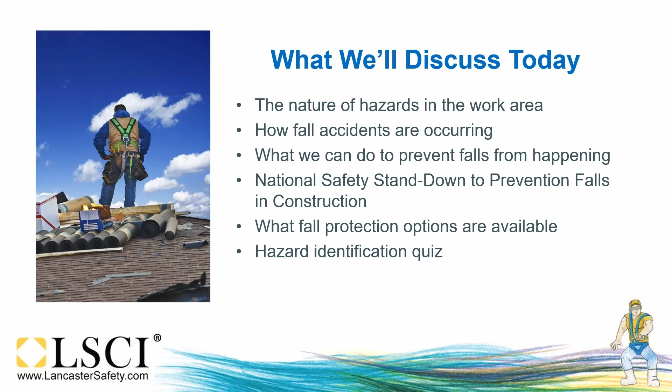Great. Thank you, Emily. You are correct. We could spend hours and hours, but today we're going to focus on the greatest hits. And the first thing you want to look at is the nature of the hazards in your workplace. Where might those fall hazards be lingering? There are lots of places. I mean, even weather can pose fall hazards. If I'm working outside and it's wet or the sun is restricting someone's sight, obviously, anytime we're working at heights, a crowded construction job site, noisy job sites.

And so the key is we need to look at where employees need to be protected from falls. So working in or on hoist areas where materials are being moved, ramps, walkways, and runways, areas where holes are present, maybe for utilities and ductwork, or stairwells, elevators. We want to make sure people don't trip or step into holes. Excavation is one of the most dangerous things that's done in the construction industry. And it's not just falls, but also caught in or between for cave-ins. Anytime we're around dangerous equipment. And lastly, wall openings. The key is any area 6 feet or more above a walking working surface, OSHA asks, be protected for workers to be able to be safe.

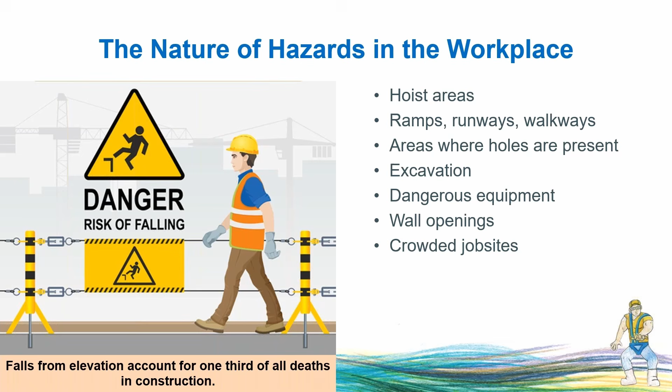So let's take a look at how fall accidents occur specifically. First, unprotected sides, wall openings, and floor holes. Almost every project site has unprotected sides and edges, leading edges, where floors are being constructed, wall openings, doors, windows, cross corridors, or floor holes at some point. If we're not protected from sight, injuries from falls or falling objects may result, ranging from simple sprains and strains to concussions and death.

A second area of focus would be scaffold. Scaffold temporary work platforms give us a great way to be able to work at heights temporarily. But we know that working with heavy equipment and building materials in a limited space of a scaffold is difficult. Without fall protection or safe access, scaffolding becomes very hazardous. Improperly constructed scaffolds can result in injuries ranging again from sprains, cuts, and death.

Third, unguarded protruding steel reinforcing steel bars used in concrete. Yes, we know we use that to provide tensile strength, and unguarded protruding rebar are hazardous. If you just stumble onto an unguarded rebar, you can impale yourself, serious injuries, or even death.

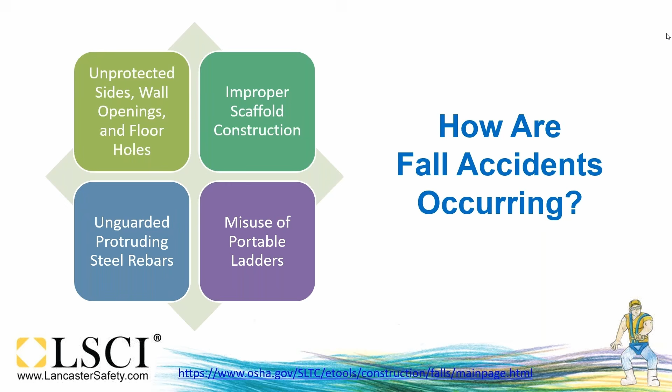I watched a person fall off a ladder and run their forearm through a number 5 rebar that was not capped properly. He passed out from the pain. An ironworker came along and cut the rebar with a chop saw, and they carried him off with a tourniquet over to the emergency room to pull the rebar out of his arm. I'm glad I wasn't there to see that.

And also, misuse of portable ladders. Ladders are a common tool that we use every day on project sites, and you risk falling if portable ladders are not safely positioned each time they're used. When you're on a ladder, it can move or slip from supports. You can also lose balance while getting on or off an unsteady ladder. Again, falls from ladders can cause injuries ranging from sprains to death.

According to OSHA, 40% of fatalities were from heights of over 40 feet. 1/4 of all fatalities ranged in heights of 11 to 20 feet, and 25% were from heights of 20 to 30 feet. The rest, 10%, were 10 foot or less. So just because you're not that far off the ground does not mean you won't get killed.

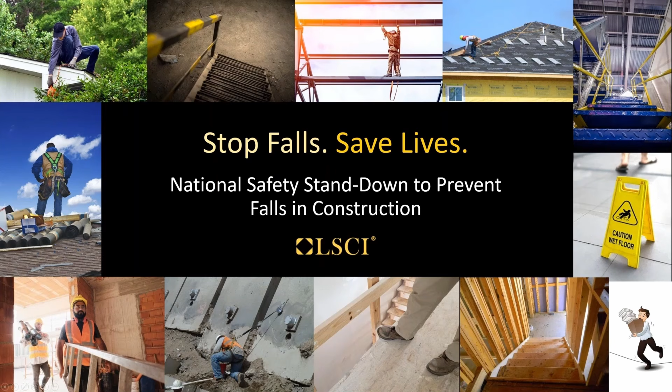Did you know that fatalities from falls from elevation are the leading cause of death for construction employees? Preventing falls in construction is such an important topic that OSHA leads an annual initiative of a National Safety Stand-Down to raise awareness on the dangers of falls in construction. While this is a voluntary event, Lancaster Safety participates each year and encourages businesses to do the same.

We take the entire month of May to highlight falls in construction and how we can work to get every employee home safely each day. So the content on the following slides provides information in conjunction with OSHA's National Safety Stand-Down to prevent falls in construction. Let's join together to stop falls and save lives.

Thank you, Emily. Last year, every working day, 15 people were killed at work. Of those 15 people, 10 or 11 were in construction. Of those, 4 or 5 were from falls. So fall hazards are common at construction sites, but even worse, fall-related injuries, which can amount to between 1,000 and 1,500 per day, are preventable.

There's 2 main ways we can address fall hazards. First and best is fall prevention. Let's prevent workers from falling by using engineering controls, guardrails, hole covers, or restraint systems. If we can't do that, or in addition to, let's provide fall arrest and rescue services. So this prevents injury during and after a fall by using personal fall arrest systems, safety nets, or having an effective rescue plan in place before starting the work.

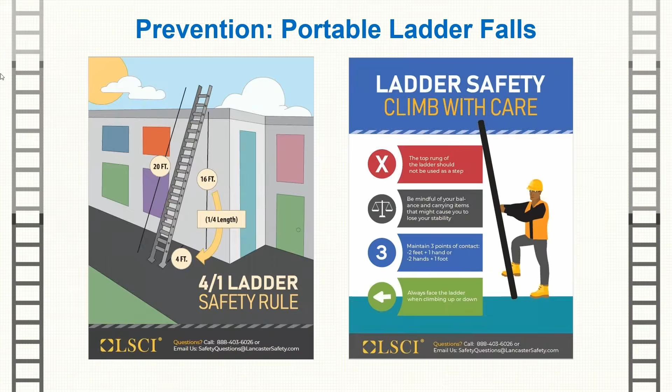Scaffolding is a wonderful tool that we use as a temporary work platform. Stationary scaffolds, suspended scaffold, aerial lifts, all allow us to work at height. The key with scaffolding is to make sure they are constructed in accordance with the manufacturer's instructions. Typically, you'll find that a guardrail system is required upon all open sides and ends of platforms. Oftentimes, suspended scaffolds will use guardrails as well as a personal fall arrest system.

We want to use at least a guardrail or personal fall arrest system for all scaffolding anytime that scaffold is 10 feet or more above a lower level. We want to make sure we provide safe access to scaffolds by ladders or climbing out of windows or other areas. There's details, again, available in the OSHA standard, as well as appendices showing some line drawings. And we always want to access scaffolding by these means of access.

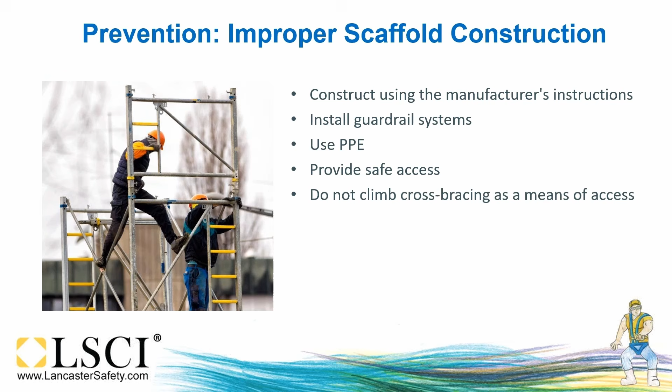We mentioned protruding rebar, again, used oftentimes to get tensile strength into concrete. It's pretty standard. Be it steel or fiberglass, we want to make sure we guard all protruding ends of the steel rebar with caps, wooden troughs, or bend the bar such the exposed ends are no longer upright. Anyone working at height that could be above an exposed rebar, we want to make sure fall protection and prevention is the first line of defense against impalement.

OSHA standard requires that rebar, quote, be guarded to eliminate the hazard of impalement, unquote. Not all guards provide that level of protection. In some circumstances, the force of a fall can cause the rebar to push clear through a plastic cap and still impale a worker, or the worker could be impaled by the rebar and cap together.

Make sure that you utilize rebar caps designed to provide impalement protection. Oftentimes they'll contain a steel or polycarbonate reinforcement inside of them. So yeah, please have the folks use those Mountain Dew cans and put them in the trash, not on top of the rebar.

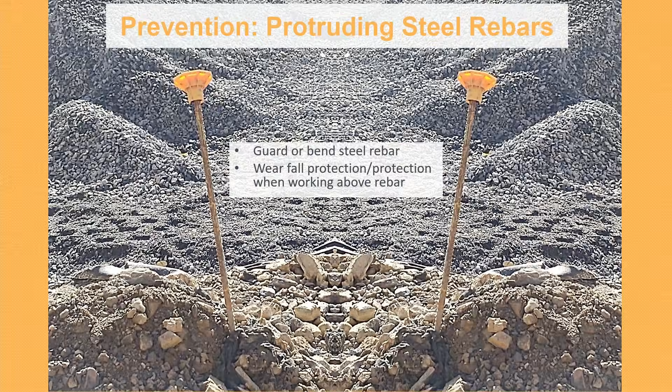Another area of issue is openings or holes. Typically guardrails, safety nets, and personal fall arrest systems are used. Again, if I can fall to a lower level, and that means walking on the ground into an excavation or from an upper level into a lower level, anytime I can be exposed to a fall of 6 feet or more, I want to use one of these particular systems. Emily, can you give us some more information about prevention for openings and holes?

Yeah, absolutely. So for existing structures, you want to survey the site before working and then continually audit as work continues. Guard or cover any openings or holes immediately. You want to cover or guard floor holes as soon as they are created during new construction. Construct all floor hole covers so they will effectively support 2 times the weight of employees, equipment, and materials that may be imposed on the cover at any one time.

So, in general, it's better to use fall prevention systems such as guardrails and then fall protection systems such as safety nets or fall arrest devices because they provide more positive safety means. And Emily, in addition to that, the covers, in addition to carrying 2 times any imposed loads, typically should be marked and should be secured so they won't easily move.

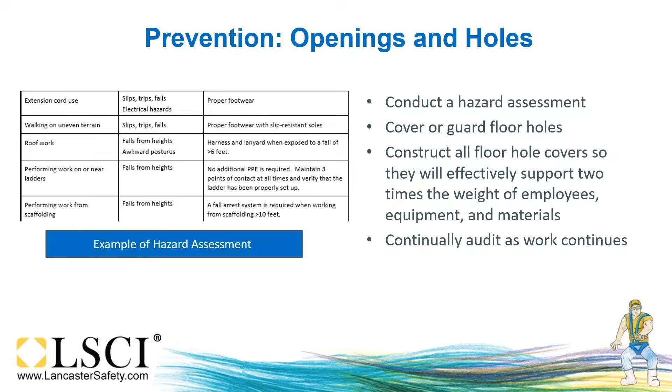If you decide to choose guardrail systems, typically the top guardrail should be 42 inches above the walking working surface, plus or minus 3 inches. You can always add more if necessary for specific types of construction. Mid-rail, as the name implies, is typically halfway between the top rail and the working level. And oftentimes a toe board, typically a 1x4 or similar, can be done at the bottom. This prevents materials or tools from being kicked over the edge. We want to make sure that there are no openings in the guardrail system more than 19 inches wide.

The top rail must be capable of withstanding a force of 200 pounds applied in any outward, downward direction. And on ramps and runways, we want to make sure guardrails are erected at each unprotected side. Again, you can add more to this as the project requires. Typically, you can use stress grade lumber. I can also use Schedule 40 pipe, angle iron. So there are options materially on how to construct guardrails. The diagram on the left gives you additional information.

On the right, you see a safety net system. Typically, safety nets should be provided anytime I'm working at more than 25 feet above ground level. They must extend at least 8 feet beyond the edge of the work surface, and they can extend more depending on the level I'm protecting. They should be placed with sufficient clearance so you don't contact the ground. They must be inspected at least once per week.

And the boundary rope must withstand at least 5,000 pounds of force. When someone falls into this and it catches them, it will put a strain. We also want to make sure that the openings are no more than 6x6, as well as inspect it. Take a look. You'll see inside of this net on the picture, we have what looks like a hose, some other material in there. We don't want to fall on that, so that should be removed before work is allowed.

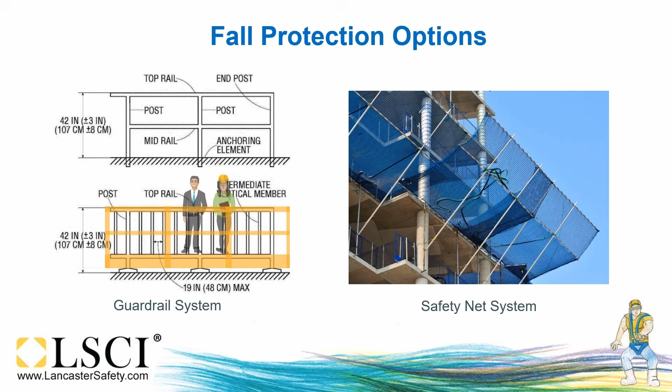Another option that OSHA permits is something called a controlled access zone, sometimes called a limited access zone. This is a work zone designated for only qualified and trained personnel to enter. Typically, it's delineated by ropes, wires, or chain. It must be created no less than 6 feet from any edge and no more than 25 feet away from an edge. You want to flag this with high visibility material every 6 feet. Controlled access zone is a very popular option when doing leading edge work constructing floors.

Another option you have is called warning lines. Warning lines, again, can be made of rope or wire or chain. They're used to warn employees of an unprotected edge. We have to place these no less than 6 feet away from the edge. They must be able to withstand a tripping force of 16 pounds. And lastly, no lower than 34 inches, no higher than 39 inches. Again, this is a warning. In some cases, this may be an option for you where you don't have other options that are more desirable.

OSHA provides a lot of options for fall protection. Take a look and see what option or options work best for your project site. There are a lot of ways to do this, and OSHA asks that you select the one or ones that provide the most protection for the workers at the particular site you're given.

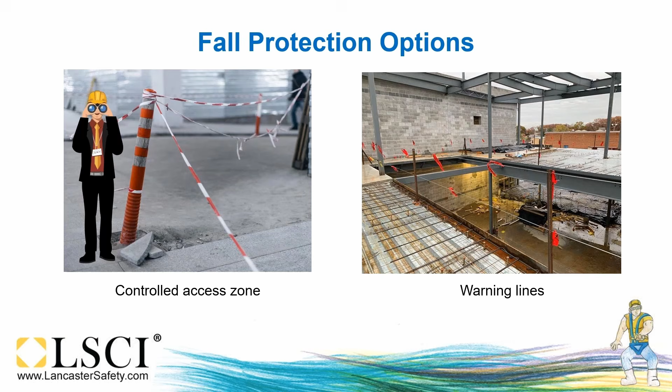You know what? I think it's time for a safety quiz. Emily, what do you think? I agree. Let's take a quick break for our first Insta Safety quiz here. So the question is, in construction, fall protection is required after working at what height? 5 feet, 6 feet, 7 feet, or 8 feet? You can put your answer in the chat box below. 5, 6, 7, or 8 feet. And the correct answer? Is 6 feet.

Very good. By the way, let's say you decide, I want to provide fall protection for my workers at 4 feet or 2 feet. Is that permitted? Yes, it is. You can make it more stringent. However, you can't say, I don't like the 6 feet, how about 8 or 10? No. So 6 feet is the maximum height. You can always go less than that to provide fall protection. Good to know.

There are a couple other fall protection options. First is a safety monitoring system. Typically, this is done in roofing work, and no greater than a 4/12 pitch or 50 feet in any dimension is typically the application. The safety monitor cannot have any other job duties. Typically, they monitor the safety of employees.

How do they do that? They're on the same level as the work taking place, close enough to be within eyeshot and earshot to orally communicate with everyone there. Easily identifiable, again, through high vis, etc., and employees should follow any directions given by the safety monitor. This sounds like it's a fairly easy job. It is not. It is very stressful, especially when we have a number of workers.

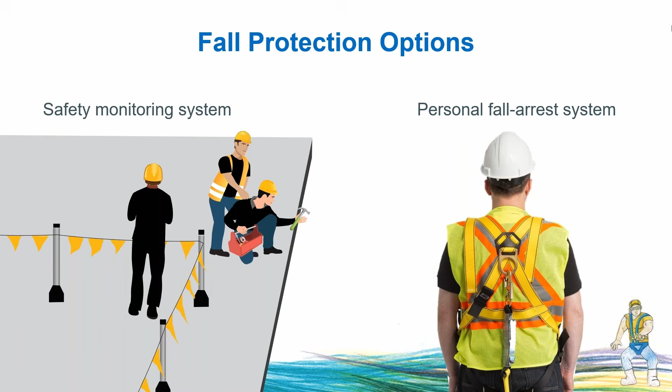So Emily, why don't you share with us the ABCs of fall arrest systems? Yes, so fall arrest systems have multiple components that come together to protect workers from falls. This includes the anchorage or tie off point that you connect to, the anchorage connector or strap used to tie off with, the body wear or full body harness, and then lastly, the connecting device, which is the shock absorbing lanyard or retractable lifeline.

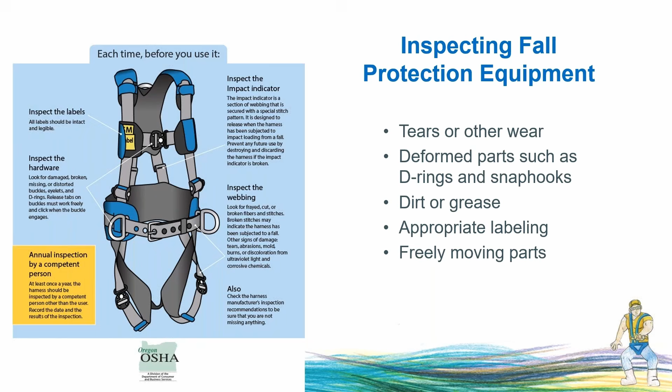So equipment must be inspected before each use for tears or other wear, deformed parts such as D-rings and snap hooks, dirt, grease, or other substances that could affect the function of the equipment, any appropriate labeling, and then freely moving parts. One item too, you'll notice it says in the orange box, yellow, down there, annual inspection by a competent person. The competent person typically in construction is one who, by training, experience, education, has the ability to identify safety problems or potential and has the authority to take corrective action. The competent person for fall protection has additional requirements. So you'll find that even though the term competent person is used throughout OSHA, especially in fall protection and excavations, the competent person in those areas has some specific requirements to look at.

Obviously, fall protection when used incorrectly can be more dangerous than not using any protection at all. Workers get a false sense of security, and they may not be as careful as they would be if they weren't using any fall protection.

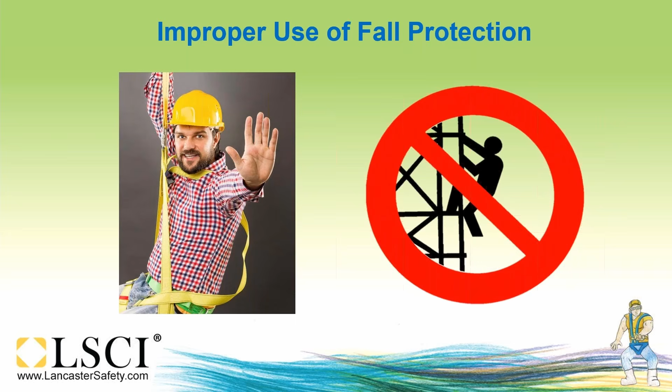I think it's time for another instant safety quiz. All right, let's do it. Here's our second one. So, again, we talked about this. Where do the most falls occur in construction? On scaffolds, ladders, platforms, or roofs? And again, you can put your answer down in the chat box below. So, falls from scaffolds and roofs are more likely to happen in construction. Dean, do you want to elaborate on that a little bit?

Yes, I think the issue, it's interesting to note on scaffolding. Again, properly erected, it gives you a good work platform, and I think we get used to it and get complacent and don't think about we're on the third floor or the 60th floor or whatever we're working on. In addition, roofs, especially low slope roofs, that's with a 4/12 pitch or less. Again, the same thing. We tend to be complacent. Oh, it's not that steep. It's not that bad. And yet, if you look, the number of citations, the number of accidents, fatalities off of low slope roofs is greater than a steep slope roof, which OSHA defines as greater than a 4/12 pitch. And I think it's because it's more visible. We're more cognizant or recognize the fact, hey, this is 8/12, 9/12, whatever, and I need to be careful here. So I think that's a great part of it.

So again, just a constant reminder, it doesn't matter. You're up at a height. It doesn't matter whether it's a flat pitch or 10/12 or whatever you're working on. Very important. Just be aware. And again, make sure you take care and be deliberate.

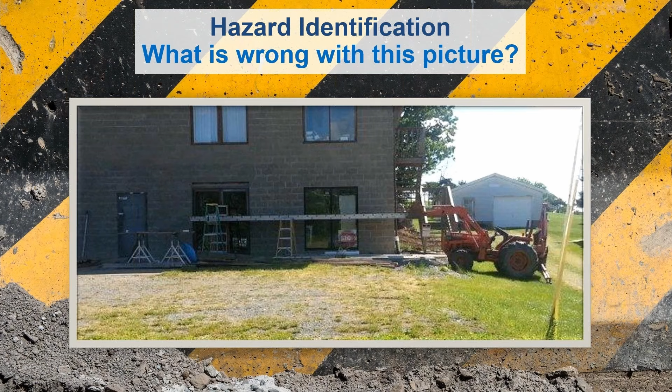And you're using that to hold up a sectional ladder, which is definitely not scaffold planking. So again, ask those questions. Well, that's what we had to work with. Well, we're going to find another way, aren't we? Yeah, okay, absolutely. I just see an accident waiting to happen here.

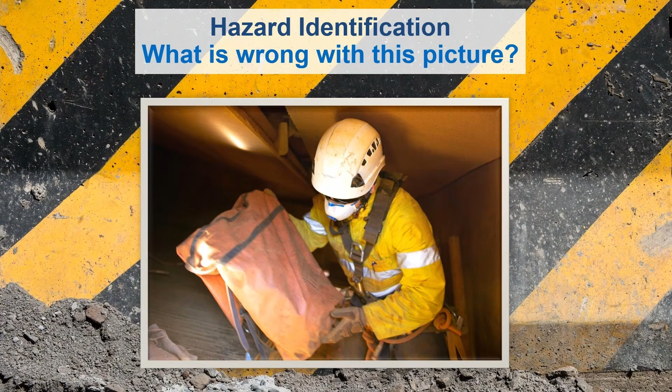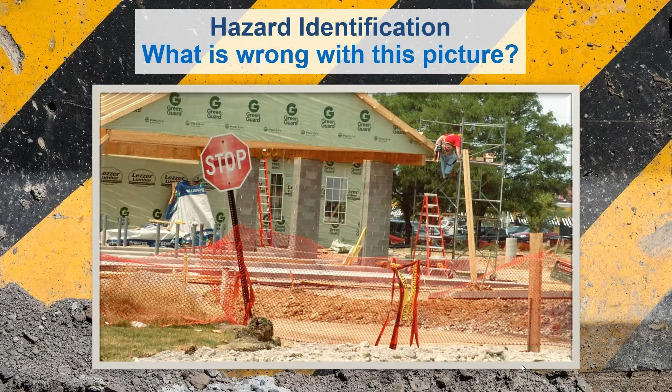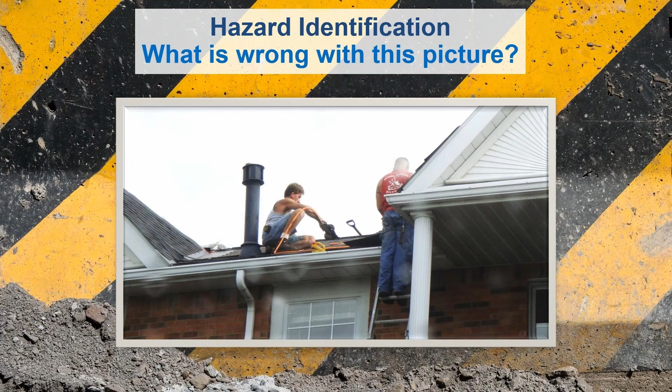What about this picture? We see this a lot, not just residentially. We see this a lot in all types of construction with roofers. I know it's a tough job. It has to be done correctly, but this is just unacceptable. There are too many ways that we can put up personal fall arrest systems, self-retracting lifelines, maybe an aerial lift. There's all kinds of options, guardrails that I can do to protect this worker, because all it takes is one slip and he's going to be on the ground.

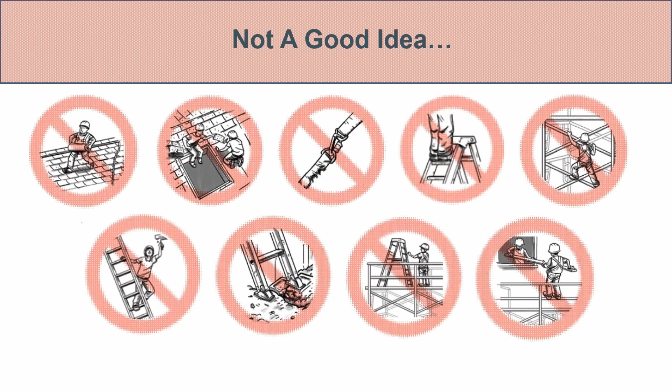Again, Emily, the key with this is if you see anything like this, don't startle a person or yell at them. Get them to understand, look, we're going to need to do this correctly. We need you. We know how challenging it is right now to be able to find qualified people to do the work at all levels. We cannot afford to have our good people that are doing this good work get injured or killed.

So I guess 5 basic ways to prevent workplace falls. First, again, when working at heights, we want to make sure the job is done correctly, quality, but also done safely. So for most tasks in construction, if you're working 6 feet or more above a lower level, fall protection is required. Only difference will be if you're working off a scaffolding, that requirement increases to 10 feet.

Second, make a plan prior to starting the work. Anticipate, do a survey, job hazard analysis. Where are points of falls? Where are anchorage points? Again, the competent person will understand this and help do this up front. By being more deliberate and taking our time, we actually get it done faster with better quality and safely. Third, right tools for the right job. Make sure you have the proper equipment.

So I want to make sure employees have the correct equipment, be it scaffolding, ladders, personal protective equipment, any other necessary tool or equipment to get the job done. We want to make sure that this equipment does not pose additional hazards, like using a defective ladder or an improperly erected scaffold. Fourth, train all employees on setup, inspection, use of tools, equipment, PPE.